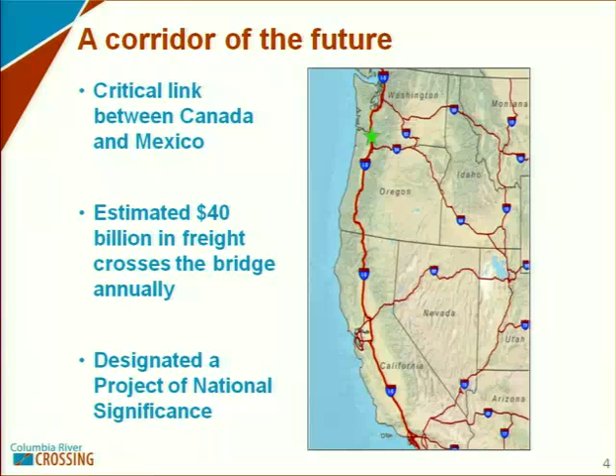This is a critical link in the I-5 corridor between Canada and Mexico. It's the West Coast's primary travel corridor and is especially critical for interstate and international commerce. The lift span that currently interrupts traffic is the only stop, or stop light some say, anywhere on I-5. The project has been identified as a national priority by the federal government, and both Washington and Oregon are supporting it. It's unique in the country in that it integrates multiple modes: bike and ped, light rail, freeway, and also marine traffic needs in a way that is unusual. So there's lots of opportunity to do great work.

For the project area, we're about 7 miles from the southern end of the project area. The project includes existing freeways and existing interchanges from about Delta Park to SR 500 up in Vancouver.

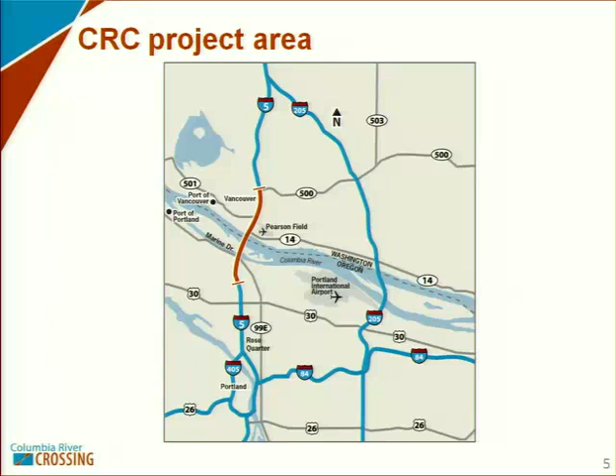We'll zoom in a little more on the project area here. The green dots are the multiple interchanges. If you have an interest in transportation planning, you might be interested to know that these interchanges are spaced less than a mile apart. If you know anything about traffic flow, or if you drive the corridor in a car, you might sense that when you put a lot of cars in that, the friction of cars moving in and weaving in and out is not ideal with that many closely spaced interchanges.

One of the key aspects to how this project developed is there was a decision to keep all those interchanges in those places because access to the local community was considered important. That led to challenges in how you can address those traffic movements in a way that smooths the flow, addressing an existing bottleneck or multiple bottlenecks, while also trying to keep the footprint as narrow as you can within the existing freeway corridor.

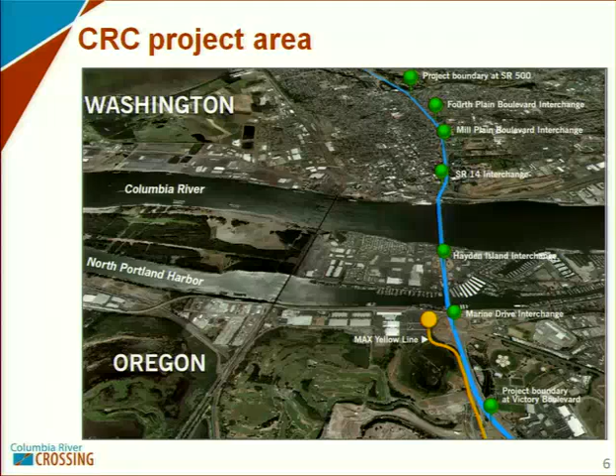The Columbia River runs from east to west through here, and the yellow line is the MAX light rail system, which currently ends at the Expo Center. The existing bridges were built in 1917 and 1958. It's actually 2 separate bridges with 3 northbound lanes and 3 southbound lanes.

There's a lot of history here. It's been almost 100 years since planners were first thinking about how to move from a ferry crossing to something freely travelable. Think about the mode changes in the last 100 years and how they were planning for it. There was a streetcar, and they were planning for wagons pulled by horses. There were some automobiles, but at much lower speeds than we have today.

The second bridge was built in 1958. Things have changed quite a bit in the last 100 years, and even in the last 50 years since the second bridge was built, we have a much better understanding of seismic risks than we did just a few decades ago. That's thanks to good work that fellow geologists have done in the Pacific Rim area in just the last 20 or 30 years.

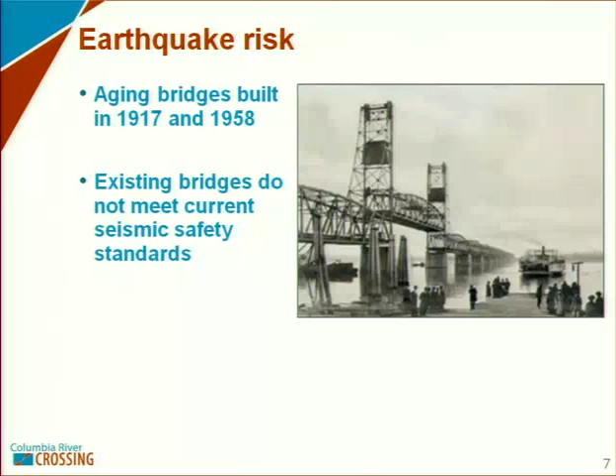That's led to much better awareness of tsunami risk, as we understand with the unfortunate things going on in Japan, but also risk to the superstructure from failure, and liquefaction, which was poorly understood when both of these bridges were built. We now have a much better understanding of how to build foundations that are more resilient during even severe earthquakes. But the existing foundations are not sufficient, and for a major corridor, this is actually a very significant risk given what we know about earthquake potential in this area.

Safety: the Hayden Island on-ramp on northbound I-5 is the location of the highest crash rate in Oregon. For this corridor, the crash rate is about twice as high as crashes in other similar urban areas. There's about 1 crash a day within the project area.

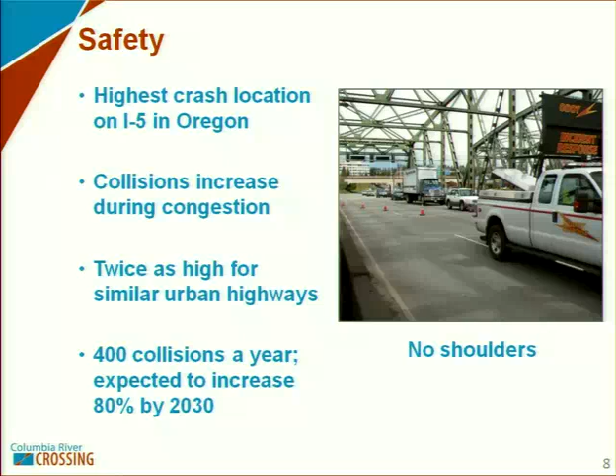I think we can do a little bit better than that from a safety standpoint. There's an issue with freight and freight mobility, that's moving goods by truck, and quite a bit happens through this corridor.

I asked specifically for this slide to illustrate something I didn't know coming into the project. I've been on this learning curve too, trying to understand the major issues we're addressing. BIA means Bridge Influence Area. Early in planning, there was a study to figure out vehicles moving through the area, where they were coming from and going to, because you need that understanding to know what the potential solutions might be.

The through trips, those coming from outside the project area and going outside the project area in either direction, are about 25% of the traffic. The blue line shows those entering from the north and exiting within this bridge influence area, about 11%. About 40% enter from within and exit south in the Portland area. And a significant number, about 24-25%, enter and exit within that area, meaning they're using the interstate almost like a local arterial. That's just an interesting piece of information.

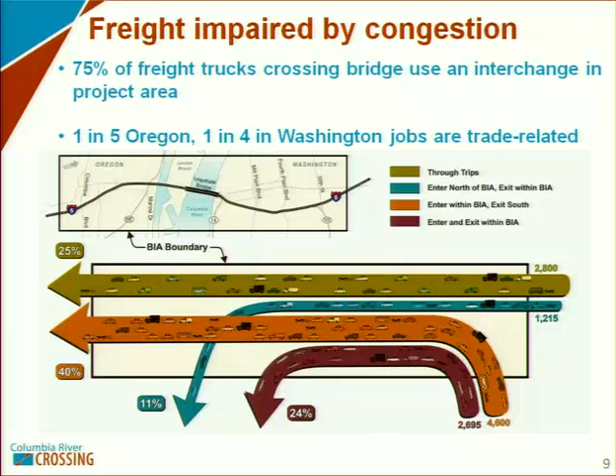If we're trying to optimize and do good planning for the future, planning for this influx of about 1 million people, we don't want to see sprawl and bad planning perpetuated over time. We need to plan in a way that acknowledges it's very likely we'll see this influx. How can we optimize how we accommodate freight without stifling economic activity in the area, these are jobs for people, and also provide travel options for everyone, especially as fuel types and vehicle types change over the next 100 years we're planning this corridor for.

So there are limited travel options right now; the existing transit service is buses, and they get stuck in traffic. By 2030, it's predicted buses will be stuck in traffic for twice as long as today. So if you're trying to encourage people to use transit, we need to do something other than just more stuck traffic, that's where light rail comes in. I think folks here in Portland know all about light rail, so that's an advantage. To me it means choices, how we can provide options for people as times change, not that people have to use light rail.

This width of the pathway, has anyone here actually walked across the bridge? For those on the web, four people raised their hand. How was your experience, was it a little difficult walking and biking across the bridge? Oh, you've biked too, so scary. We're looking at a slide showing a person standing to the side while a biker passes, it's really not conducive to bikes or pedestrians. For such a major connector between urban areas, I think we can do better than this.

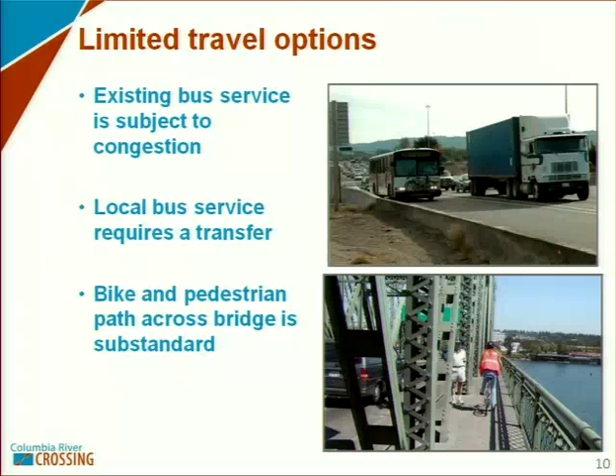It's such a beautiful area that has the potential to attract people from all over as a bike route, but also as a tourist destination, where you could take pictures of this historic river and the surrounding geographic area. But from a logistical standpoint, right now two bikers can't pass each other. If you're in a wheelchair and come across somebody else in a wheelchair, it's very difficult to pass, if not impossible in many areas. So clearly it doesn't meet our current ADA requirements, and practically speaking, it's certainly not encouraging of bike and pedestrian travel.

Okay, so critical I-5 problems. What this slide is, is a summary of the basic purpose and need of the project. This is why we're doing the project.

Sometimes when we talk about bridge type and all of those things, we get caught in the weeds about details, and sometimes we need to remind ourselves why we're doing this whole thing. We do need to significantly talk about bridge type, and we'll get to that.

But we're here because of those collisions, the congestion, the bottlenecks. It's not necessarily a capacity expansion, it's getting the bottlenecks out, and there's a couple of reasons why that's good, not just from a capacity standpoint, but also from a greenhouse gas emission standpoint. We have people idling longer than they need to, and to the extent that we can decrease that until the time when we have different fuel choices that don't emit greenhouse gases, that's a benefit as well.

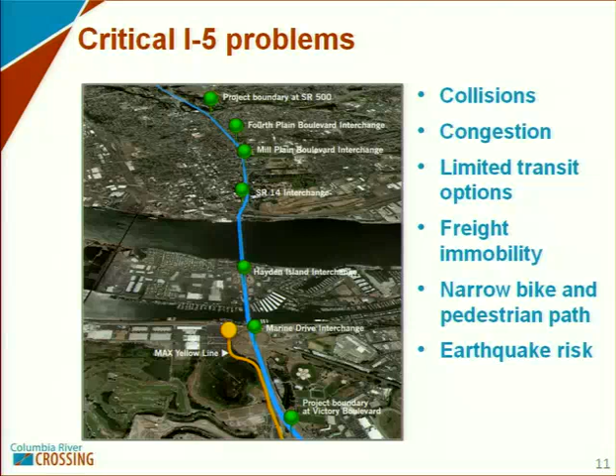To provide different transit options - we have very limited transit options now. The issue with freight I touched on, bike ped, I think I've already touched on all of these.

Okay, so for solutions, there's been quite a public process, and it goes back a long time, 10 years. So if you're students in transportation planning, know that when you have major projects, it takes a long time, and there's a good reason for it. When you're talking about spending $3+ billion of taxpayers' money, you want to make sure you're spending it on the right thing. And to do that, you need to be informed by the public and other stakeholders, and make sure that as you spend it, you're spending it wisely.

We have spent quite a bit of money on this so far. Everyone's seen that number in the papers - it's $120 million.

And again, stepping in as a new person, I ask all these same questions. It is a lot of money, but it's also in line with other projects of this magnitude. It's necessary not just from the planning purpose, just needing to have that outreach and community involvement and talking in that planning sort of context.

But some of the other things that we're doing is trying to minimize risks when we actually build the project. So doing testing, soil testing and pile driving testing - those things that we know are big dollar ticket items when we're actually in construction, and to the extent we can minimize those risks, that's some of the stuff that we're doing up front.

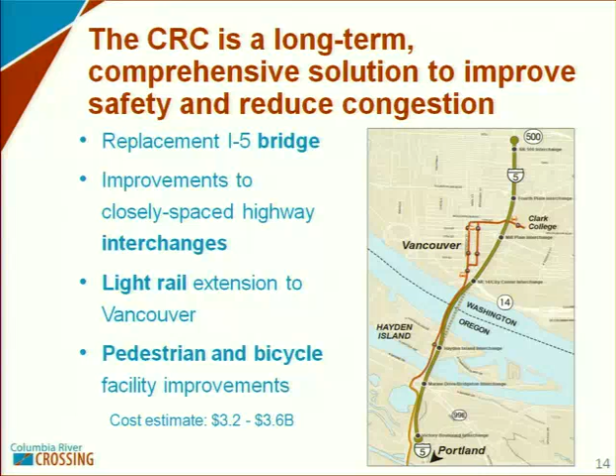As soon as we hear from some direction on the bridge type, we will update that estimate. But I don't imagine, based on the information we have so far, that we should see a significant change in that. But our intention is, as soon as we have that information, that we're going to update the estimate. It's been, is that about a year old? Okay, so we're planning for that right now.

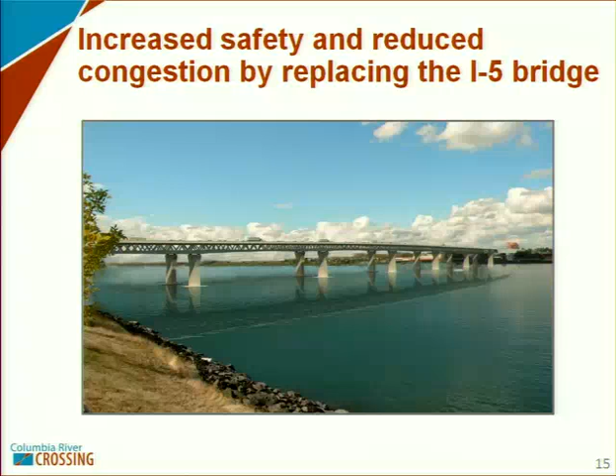what this is, as I'm going to let you talk about this in a minute, but it's 3 lanes in each direction, 3 through lanes, but it's 5 lanes in each direction total because of those closely spaced interchanges, with light rail down below on one bridge and bike and ped on the other bridge. That's the deck truss. And we're going to talk about that more, as I said.

Let's see. Where we're also headed as a solution is expanded travel options. And I already touched on this. Bike travel will be safer. I want to talk about bike and ped travel on this slide too, just because I want to point out that there are parallel planning efforts in both Portland and Vancouver that are going on right now to provide bike and ped links. And what we're trying to do is plan this project in context with those other studies that are going on that will really facilitate that bike and ped travel over the water.

This provides for the urban planners in the group and the architects in the group some opportunities from a station planning standpoint and really from an urban design standpoint, and light rail is right at that transition point between the transportation mode and the community. So that's where you get that human scale design sort of thing, and that goes as well for the bike and ped facility. So the point I'm trying to make is that we're trying to view things like aesthetics and architecture from a very large scale, but also a human scale.

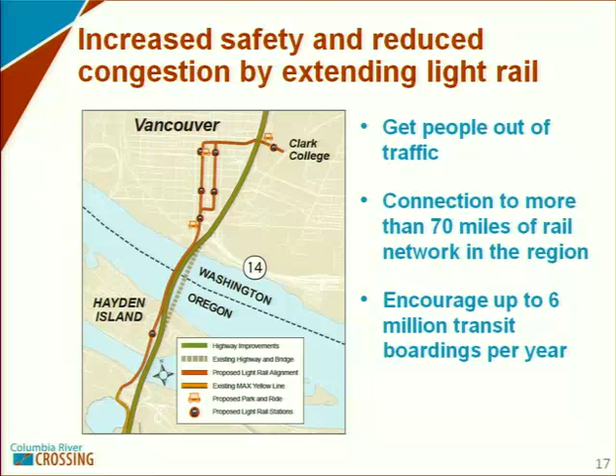And a lot of the interesting work on that is still ahead of us, because right now it's just in a kind of planning concept. And our intent is over the next couple of years to take that from concept to reality and how we're going to instruct a contractor to build this facility. Did I miss anything on that? Okay.

Okay, so what are we trying to do here? We're trying to support economic growth in a smart way. And again, we're trying to plan for the future and how we're going to create jobs, not just with the construction-related jobs, but to support what we hope will be a base for a strong economy in this entire area. Easing congestion, improving safety, protecting the environment.

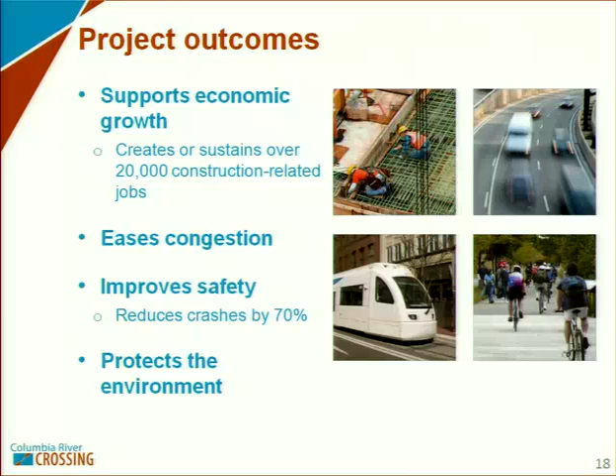Oh, now I get to hand this over to Frank, who will talk about these independent reviews, including the bridge panel review, and then after that, we're going to answer some questions, right? Okay. Thanks, Nancy. My name is Frank Green. As Nancy mentioned, I'm an engineer on the project. My current designation is the structure engineering manager. I've been on the project now for going on about 5 years.

I was there, as Nancy mentioned, when there were 70 different ideas of how to cross the river and what transit modes could be, and how that refined down to a locally preferred alternative in the 2008 timeframe. So I'm going to discuss some of the independent reviews and some of the recent work that's gone on the project, covering about the last year's worth of work.

In mid-2010, the governors for both states convened an independent review panel with several purposes, but some of the focus was to ask that review panel, which consisted of several national experts in their field, to look at our project as far as the implementation plan, the planning regarding how a program as big as the corridor improvements we're proposing gets implemented, and looking at what we're proposing with a lot of our stakeholders.

To look at our financial plan, as Nancy mentioned, it's a pretty big number for a project in this region. 3.2 to 3.6 in that latest estimate is definitely one of, if not the biggest, infrastructure improvement projects that we've looked at in this region historically.

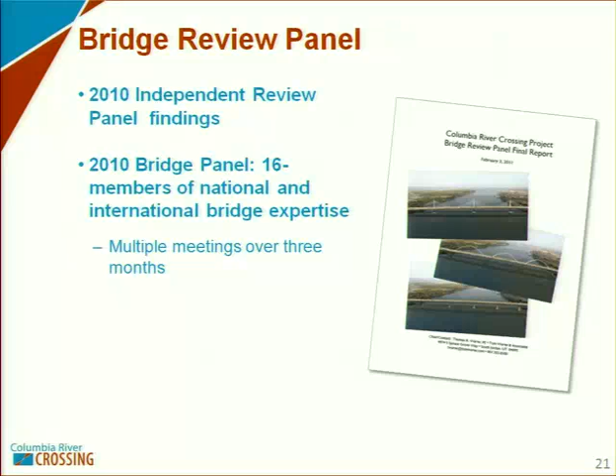This bridge review panel was convened in late 2010, and I think October and November were their first meetings. There were 16 members on the panel, including several well-renowned engineers and a couple of renowned architects. They met from November through February and presented their final report in early February to the DOTs. I'm going to walk through the constraints for the bridge itself that are really driving some of the things they've been looking at. That group was given the ability to try to push back on some of the constraints that the project has been working with for several years.

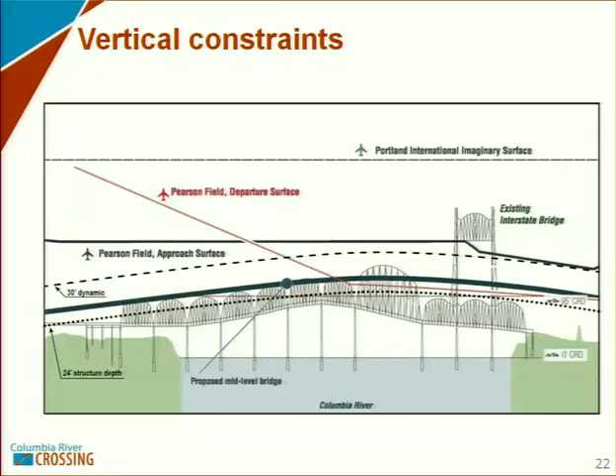And so you can kind of see the envelope that the project has used for the profile that you see, with the bottom dotted line being the depth of a structure that you're going to build, the top dash line being what we would call the dynamic envelope, which is trucks, cars, illumination for lighting, sign bridges, signs. That's kind of the above deck envelope that you would see with a bridge.

Some of the other constraints to discuss, as Nancy mentioned, it's improving the interstate in an already developed location. And so this is a picture that's looking north from Marine Drive, which is located near the south end of the improvements that we're making. But it really shows you Hayden Island. The I-5 interchange on Hayden Island is the only access to Hayden Island currently. And Hayden Island is developed. There's a shopping development. There's hotel, dense, some residential, a lot of already developed property on Hayden Island itself.

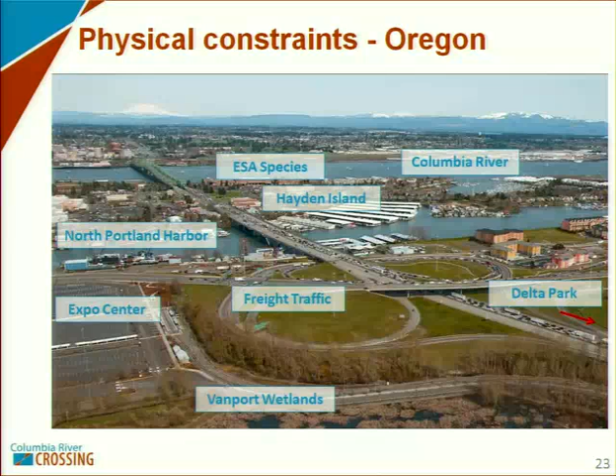And then as you move into Vancouver, I'm jumping ahead here. There's the Columbia River, but there's also the North Portland Harbor. So there's really 2 bodies of water to cross with our improvements here. And so you can see the bridge, as you're looking into it, any planned improvements have to really go through something that's already currently developed. In Washington, it's a very similar situation. We have the Burlington Northern Railroad, the Apple Tree Park, downtown Vancouver.

Oh, sorry. I will. Does anyone else know what the apple tree is? I'll explain it. It's actually very cool.

So since I went over Apple Tree, it's a 4F property, but there's one single tree here whose history dates from way back when the fort was first established. Someone planted it, and its history dates back into the 1800s, I believe. The tree itself, if you've ever been out there, actually has a chain mesh fence around it. But it designates this entire area here as the 4F property, the park that is part of that. The land bridge that was constructed from the fort to cross over SR-14 and really tie to the waterfront also ties to that Apple Tree Park location. So it has close ties to the historic reserve.

And then the historic reserve and downtown Vancouver itself are really right on the edge of the existing I-5 corridor. And so the purpose of showing the Hayden Island picture and the Vancouver picture is, throughout construction, we know this is I-5. This is a main thoroughfare for all the stuff that Nancy mentioned before, all the freight, the transit, the vehicles that are going to work, coming home from work. So during construction, we know that we're going to maintain traffic, performance and use of I-5, but there are really tight constraints to try to build a new river crossing, to build or improve these interchanges.

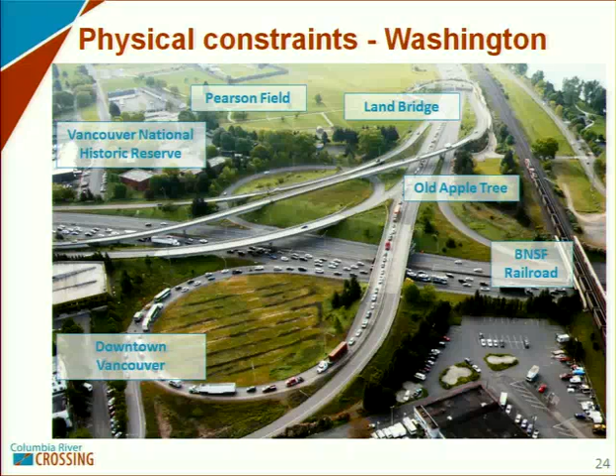So I think I have a few more slides to get through, and then hopefully we'll open up for some questions. The bridge panel, in their final report in February, came out with several recommendations. The first recommendation, based on the risk inherent with the design and the potential for cost increase because it is a unique use of a structure and a design, was to discontinue any further planning or design on the open web box concept bridge that had been developed. The secondary part of that recommendation was to look into developing one of the three bridge types that they said could be a more traditional type for a river crossing like this.

The three bridge types that they recommended were either a tied arch bridge, with an arch running down the center of the bridge, a cable-stayed bridge that's supported by cables, or a deck truss option that is similar in appearance to the bridge that had been worked on previously, but a little different in the engineering. The tied arch and the cable-stayed bridges use a one bridge approach, one single bridge with the width for I-5 northbound and southbound, whereas the deck truss would likely be a two-bridge scenario, a northbound bridge and a southbound bridge. All three options were seen as viable to move forward with.

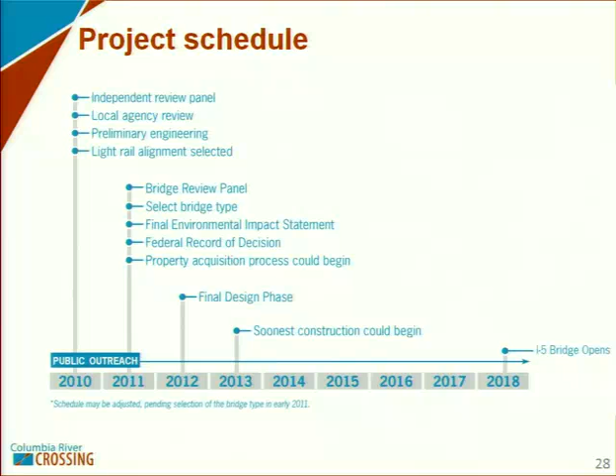I think there's one more slide on what to expect. All right. We're in the process of reinvigorating our outreach program, making sure that we have advisory groups that can help inform the project, and that we're having good public dialogue. You know, if you think about project development, even the bridge type discussion, all this work up to now is all just kind of the backbone of the project. It's the basics. And it's all refinement.

It's the refinement. If you're building a house, the analogy I've heard is the initial work that we've done so far is just deciding if you're going to have a ranch, you know, the basic structure of your house. All that architectural detail. Now, granted, you have different opportunities depending on bridge type for that architectural detail. But there still is good detail work to be had, no matter which bridge type.

So we're looking forward to having that dialogue and making sure that we are engaging all the right folks that we need to. And so we're going to reorganize our staff as well as a project team and make sure that we have the right combination of folks to help inform that discussion.

Is that my last one? All right. Yeah, I went a little long, so sorry. Sometimes I go off on tangents a little bit.